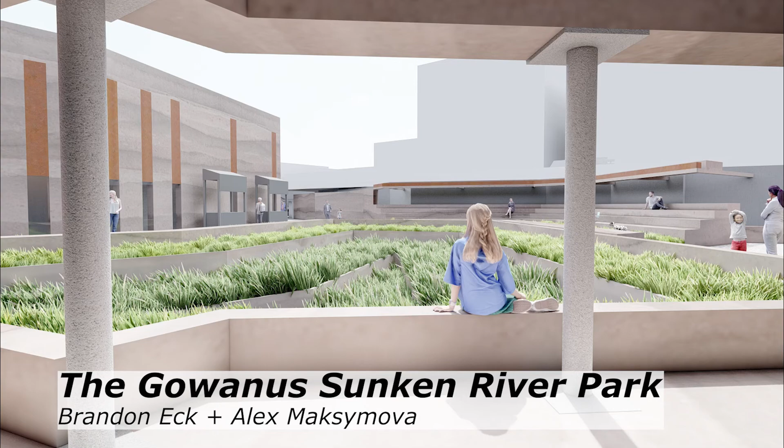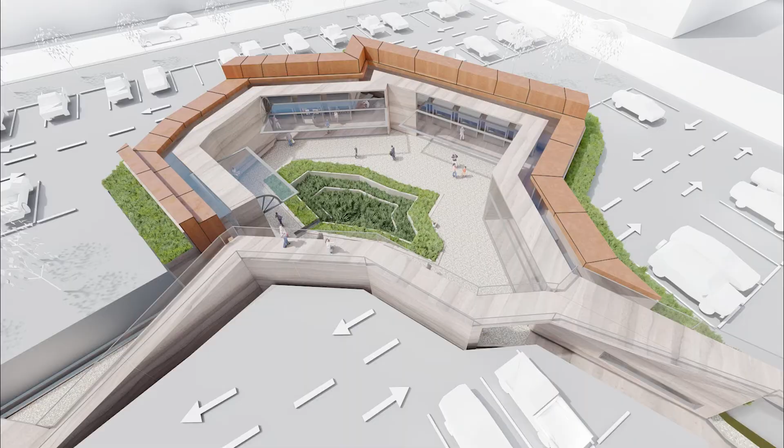The Gowanus Sunken River Park examines the concept of memory for both natural material erosion and human alteration for the geographical area of Gowanus, Brooklyn. Through this examination, we uncovered the past of the historic natural Gowanus waterway system and merge it with the urban present, which leads into a new coexistence of nature and architecture.

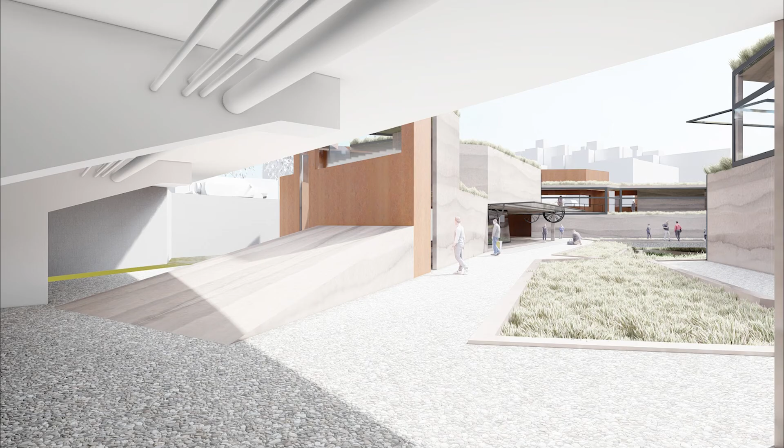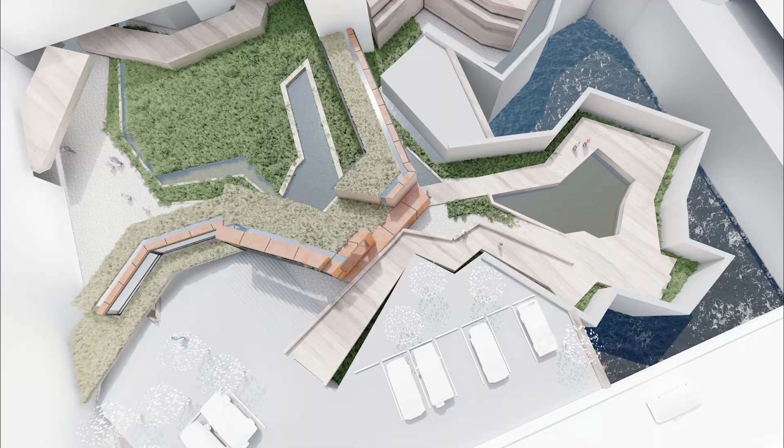By using the historical Gowanus waterway, we developed design tools and utilized a kit of parts involving rammed earth construction, Corten steel, and glass. We focused on three zones where our constructs include public spaces for individual contemplation, group activities such as workout classes or reading clubs, and local commerce events such as farmers markets.

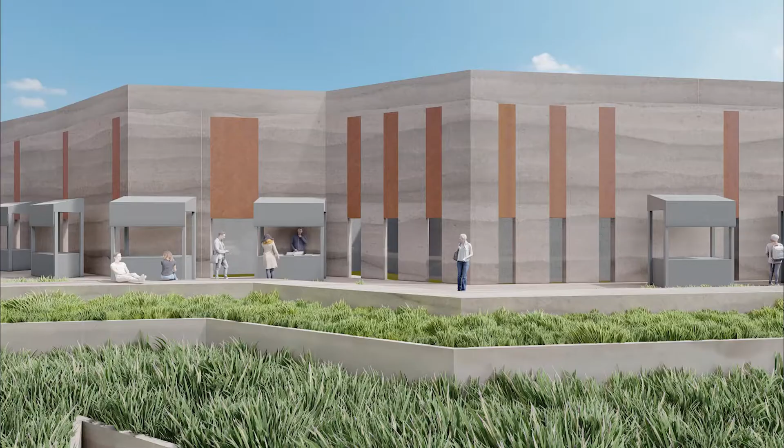The project understands and accepts flooding through the use of resilient materials and external water channels, which provide a substantial gutter system that allows flooding to flow to the perimeter of our zones.

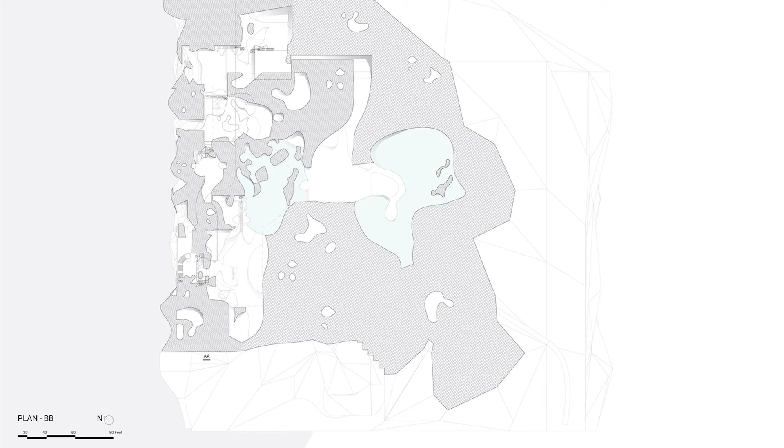Our project is an underground retreat carved in the existing topological conditions in Matera, Italy, for a day getaway. The result of this exploration is an evolving architecture that could disappear, erode, or evolve throughout its lifetime due to the erosion of existing topographical conditions.

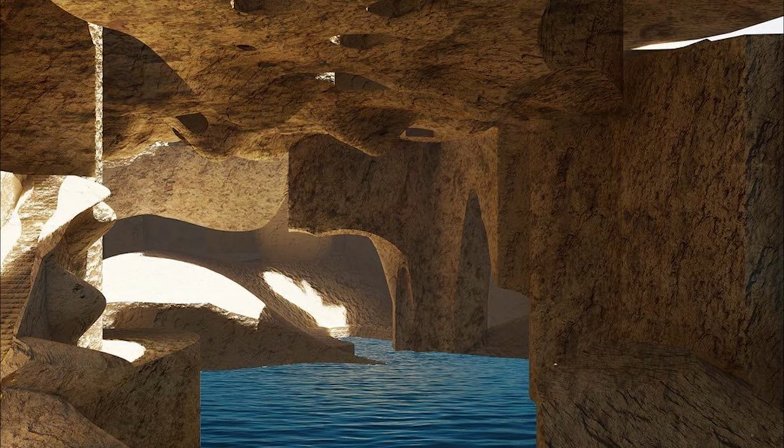The project's initial idea was exploring natural formations such as karst and tufa caves, evolving toward a discovery of ambiguous spaces. History is filled with the scars of humanity, whether it be the physical scarring of the landscape due to our anthropogenic extractionism or the cultural scarring of immigrant history.

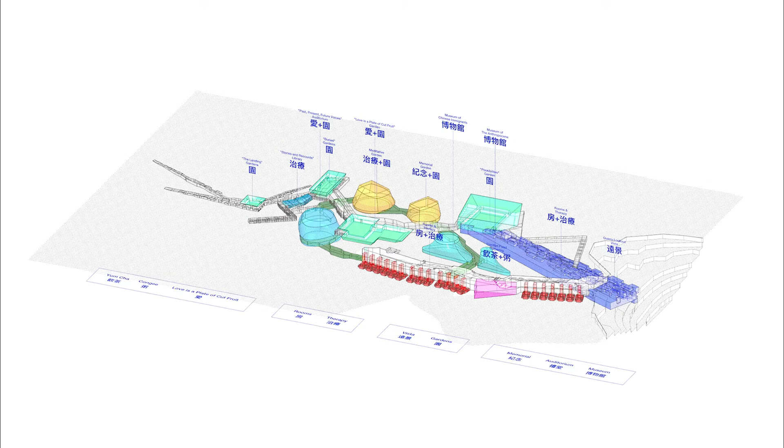Our current methodology of dealing with them is erasure. The current modus operandi of repairing open-pit mines in California is backfilling, a physical act of erasure of the damage, and the Chinese immigrants who came to the U.S. that toiled on the railways and mines were almost erased from history through the metaphorical burying of their stories.

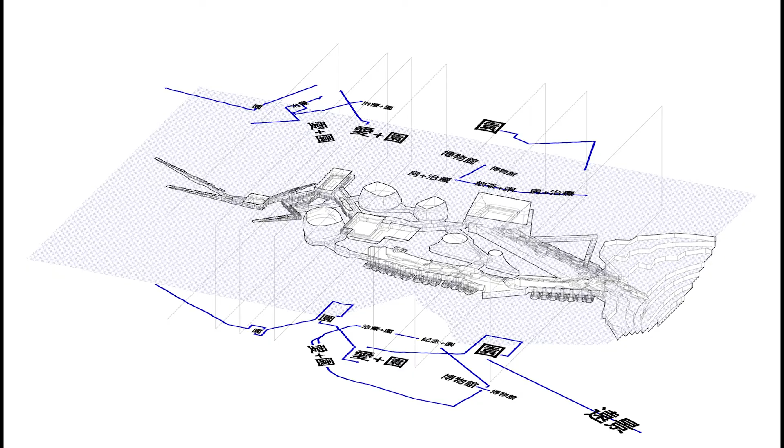So what if we embrace this damage rather than burying it? What if we use the methods of extractionism and the toiling of the immigrants to create a space of healing, remembrance, and exposition? I propose a space which offers an experience to embrace the grandeur of the anthropogenic age, to view the expansiveness of our damages in order to highlight the power and reckoning we have brought onto ourselves.

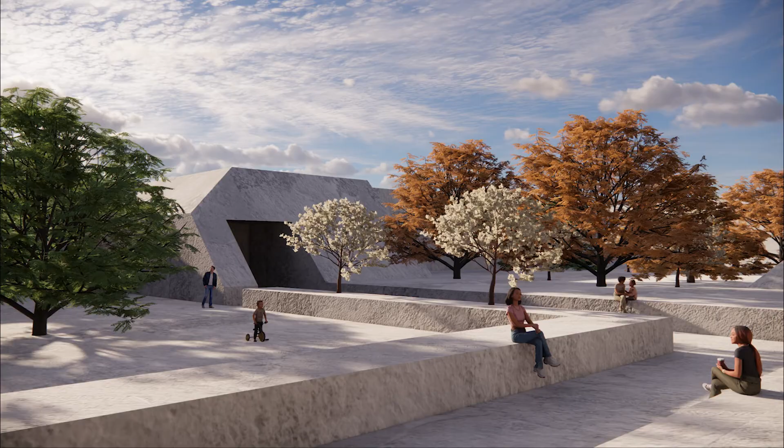Furthermore, the experience shall produce a memorial and walk mirroring the immigrant experience, with spaces geared towards healing and memorializing those who came before us, with residences allowing one to spend time to reflect on the two points.

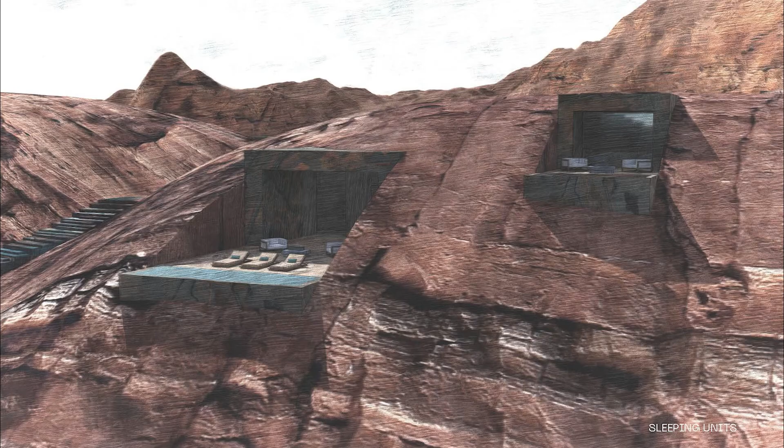Through extensive research into stone quarries, I found inspiration in creating material studies that embody the essence of marble but function in a customizable and personal way.

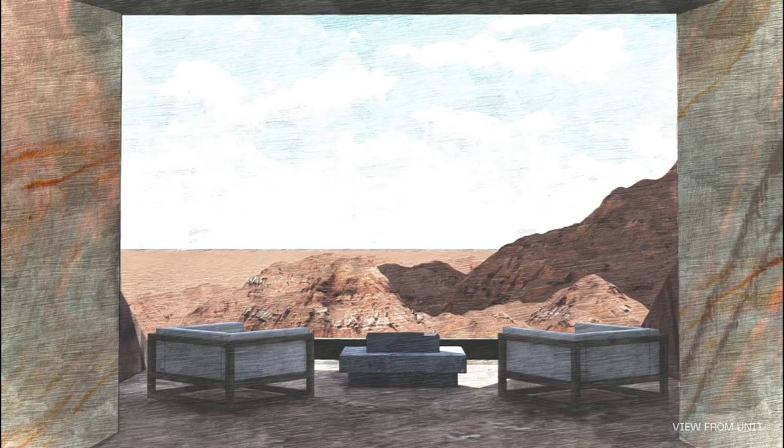Using ceramics, I created clay blocks with different controlled patterns that can be implemented into large-scale structures using rammed earth construction. These dynamic textures can be used to camouflage a structure into the landscape or have it stand out with expressive colors and textures.

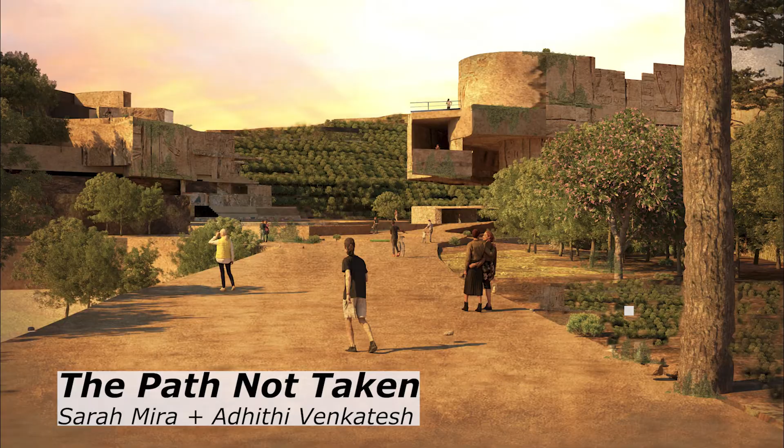The path not taken leads to a center of rejuvenation and revival of the body, mind, and the nature it interacts with.

Our design offers new species of spiritual spaces that never lose contact with its environmental influences and embrace its impermanence of connectivity with the ground, creating interiorities that change over time. It's the relationship with the ground that transforms, constantly allowing its integration and evolution.

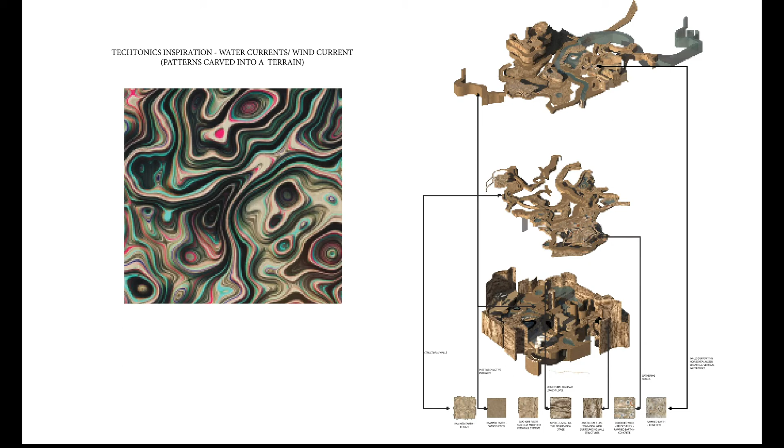It is our way of paying homage to the indigenous people and celebrating the journey as one makes their way to the sanctuary through the long pathways from adjacent cities, coupled with shaded resting areas and ramps. The entrance, although seamlessly blending into the context, exposes all the interior spaces towards the crater.

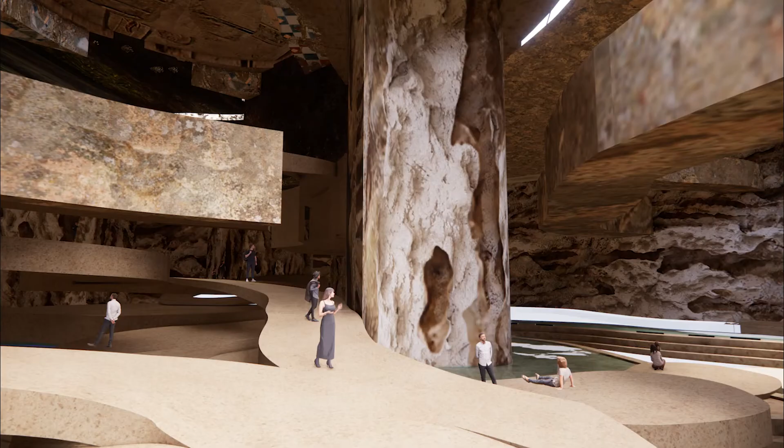Our chosen site, Lake Guatavita, a small body of water in a forest-fringed crater northeast of Bogota, central Colombia. It was a sacred site to the Muisca people who cast offerings to sustain the lake.

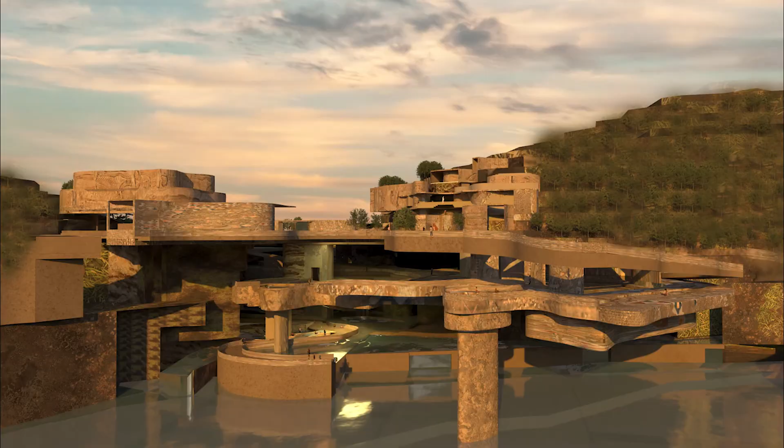We would like to explore spaces that change over time through the integration of mycelium, which forms spaces through growth and decay. With this, the community can learn about the growth of mycelium and how it can be a viable material both architecturally and for harvest and repurposing.

The project is clearly defined by the path that leads to it. It allows a visitor to see it even before arriving there.